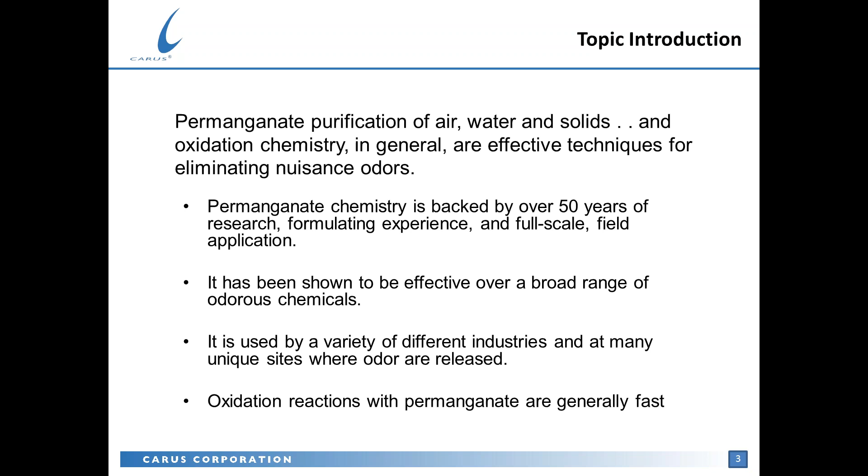So interestingly, over the past several months, we've had a number of requests for information on odor control. And I say this is a little bit unusual because we've had rather extended winter here in the northern part of the United States. And odors are really more of a hot weather, summer type of issue. But it did lead us to the idea that maybe the time was right for a webinar presentation on permanganate's role as an odor control technology, and to review in particular the various forms of permanganate products that we offer and how they make permanganate effective and easy to use.

Now in this presentation, I'm going to build a very brief foundation by introducing some basic concepts on odors and a couple that will simply review oxidation chemistry and specifically permanganate's unique oxidation chemistry. And that will lead us to the real purpose of this discussion, which is to describe the many permanganate products that are now available. And finally, how to identify different odor release and treatment scenarios that show how we can match the specific product to that particular location. So the problem of odors, it's a difficult one.

Odors and developing effective odor control is tough to solve, and in particular, one aspect of monitoring and tracking odors is that we have to rely on our nose, the human nose, as our detector. And that can make effectiveness a difficult goal and one that can be quite subjective.

You can see here on this particular slide, I've used an EPA diagram which shows that response to odor compounds by the human nose follows a sort of normal distribution. So there are some people at one end of the spectrum who don't recognize very many odors at all. And then we have the very highly sensitive population up at the right-hand end of the curve. And that makes odor measurement and detection a statistical analysis in particular.

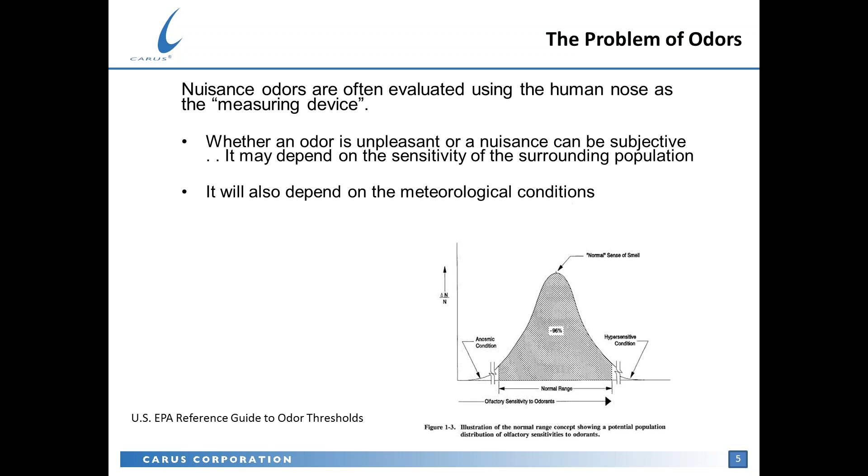Now, our sensory perception of odors really has four major components, and they are the concentration of the compound or the element, the molecule, its intensity and how we respond to it, its characteristic, and the hedonic tone of it, which is whether it's rather pleasant or rather unpleasant.

Now, the concentration is measured usually using a panel of people who are smelling different samples that are diluted with odor-free air. And there's a statistical analysis that tells us the detection threshold or the recognition threshold, and that's usually 50% of the panel that indicate that they have detected or recognized a particular odor.

In particular, though, I want to focus on the odor characteristics. So it's very common for us to identify odors based on how we respond to or how we recognize what that odor reminds us of. So, for example, we can describe an odor as being fishy or nutty or rancid or sewer-like. And these are important because they are tied to the molecules that we're detecting.

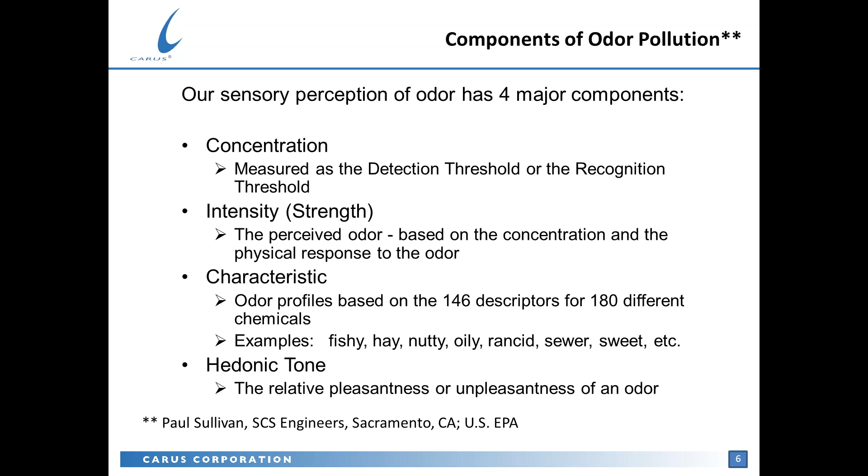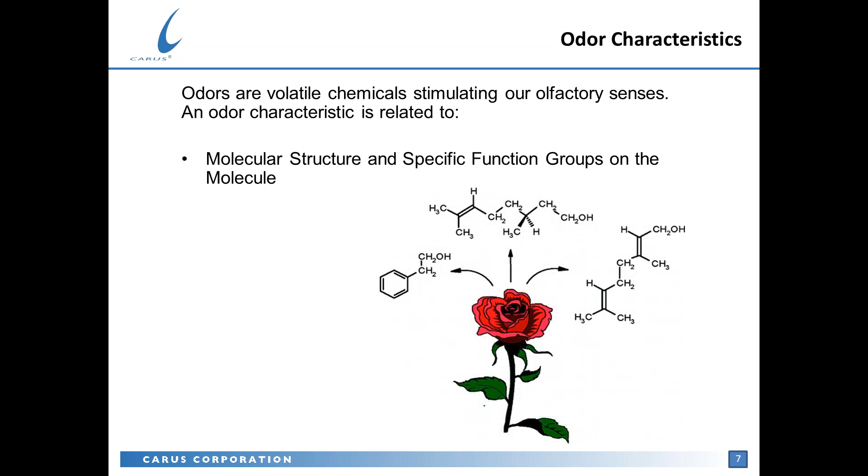So odors are volatile chemicals that are released into the air where they can be detected by our nose. And our perception of odor is triggered by the shape and also the chemical functionality on a particular molecule. Now notice that these molecules that are shown here have very distinctive shapes and elemental structures. And remember that on paper or on screen, these molecules look flat, but in actuality, they're three-dimensional.

And I also want you to notice in this particular slide the different functional groups on these molecules. So we have a phenyl structure or an aromatic structure. We have alcohol groups on these molecules. And we have unsaturated double bonds that contribute to the structure of these molecules. They're important when we investigate how permanganate may or may not help to solve an odor situation.

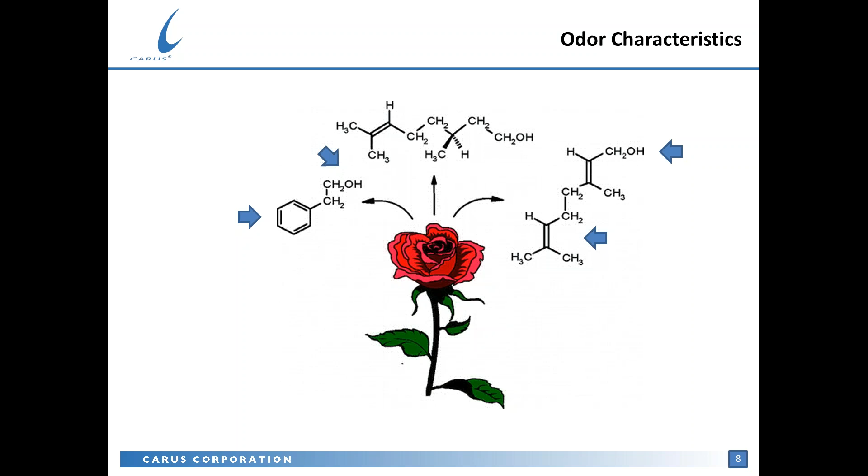So what is permanganate? Permanganate falls naturally into really two chemical buckets. The first is the group of manganese, the fact that it's a manganese compound. And manganese is a transition metal that is, like iron, found throughout the environment and is present in soil, water, plants, and animals that we live with every day.

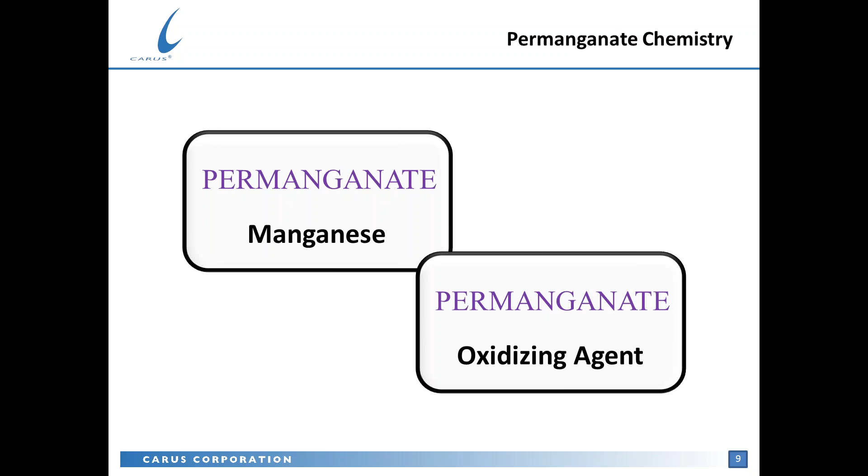Now, when we manufacture the permanganate, it becomes and falls into the category of oxidizing agents. And that is the chemistry that we take advantage of when we're doing environmental work. So during the manufacturing process, we inject energy and add oxygen into the manganese backbone that we start with. And to the chemist, oxidation reduction chemistry often involves the transferring of electrons.

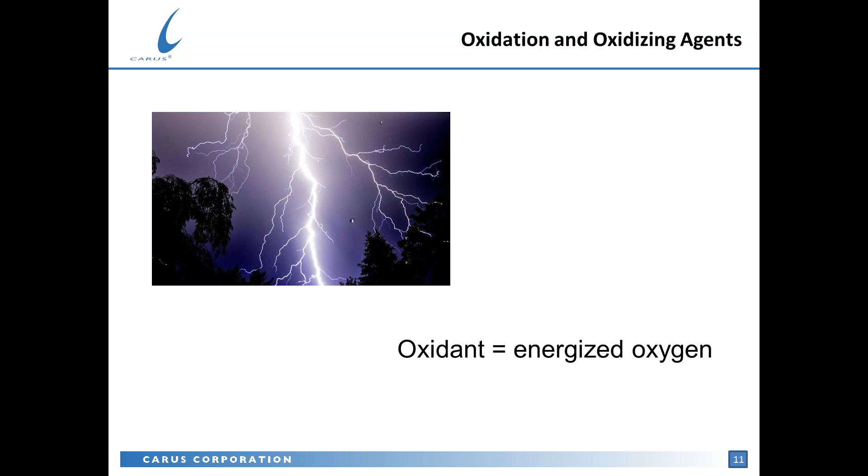But if you or someone you're working with is not really familiar with chemistry or with oxidants in general, it's easy to think of an oxidant just simply as energized oxygen. Now, it's likely that the name oxidation is a result of observations of our physical world. We live in, after all, an atmosphere of oxygen. So it's probably soon noted that almost all elements form oxide compounds just through exposure to air.

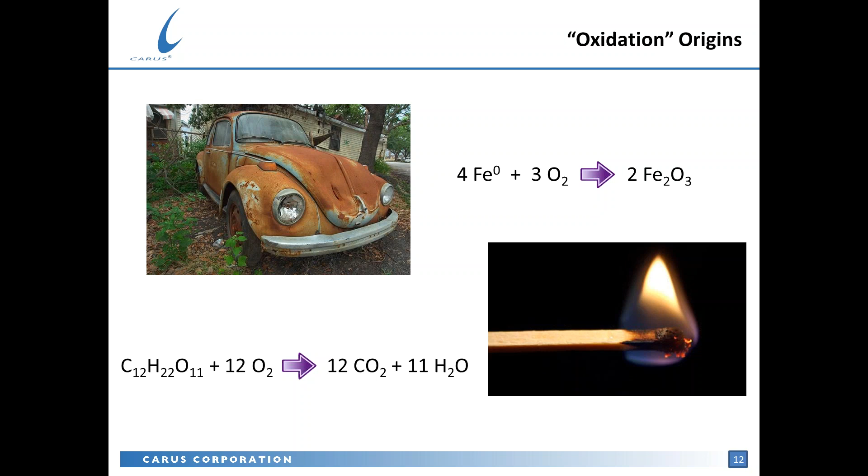Now, oxidation chemistry is actually important and actually is quite fun because it's a very versatile oxidation chemistry. Oxidants can be used and are often used to synthesize other materials. So we start with simple molecules and we convert them into something a bit more complex so that they can be used in a variety of different functions.

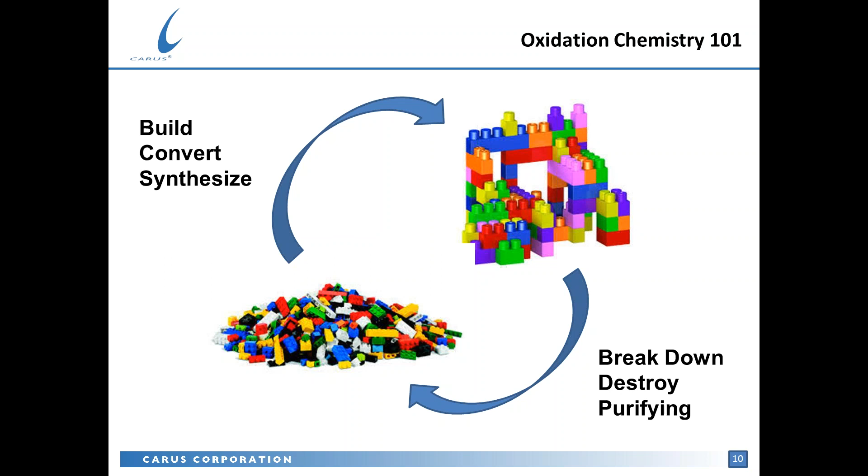However, in the environmental applications that we're generally talking about today, oxidants are very effective at breaking down large molecules and converting them into smaller bits, which are odor-free or tasteless, or are not any type of environmental problem after they're made that way.

So here's permanganate's half of the oxidation chemistry, or half of the oxidation reaction. On the left, you see the MnO4 ion. That's the permanganate ion that we represent here in purple color, because when permanganate is dissolved in water, it has a very distinctive pink or purple coloration to it.

Now, when permanganate reacts with a pollutant, it's going to contribute 3 oxygens to that reaction. These won't be free oxygen or dissolved oxygen in solution. They'll combine immediately with the compound that we're reacting with. And the manganese portion of the reaction will precipitate out as a hydrous floc of manganese dioxide, which is MnO2.

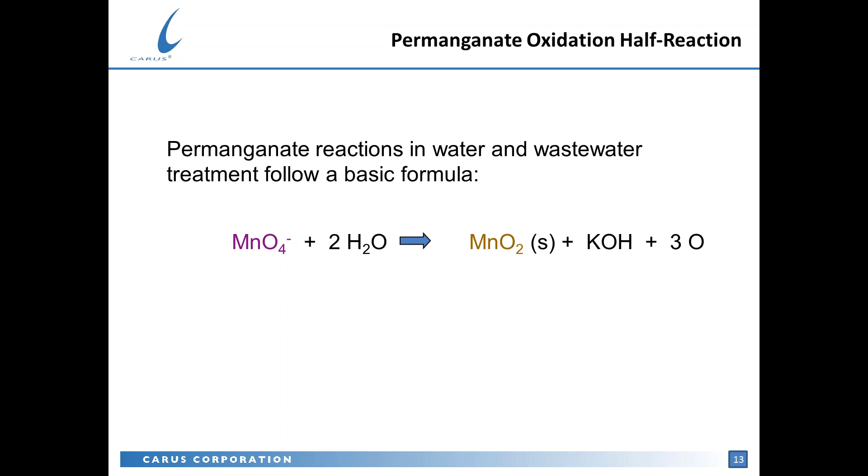The functional groups that permanganate tends to be very, very effective at reacting with are shown here on this particular slide. Permanganate likes to react with unsaturated double and triple bonds on organic molecules. It is very good at reacting with alcohol groups and the reduced sulfur equivalent of that, which would be a mercaptan type of compound. Permanganate reacts with phenols, with aldehydes and ketones, and it also reacts with nitrogen-containing compounds such as amines.

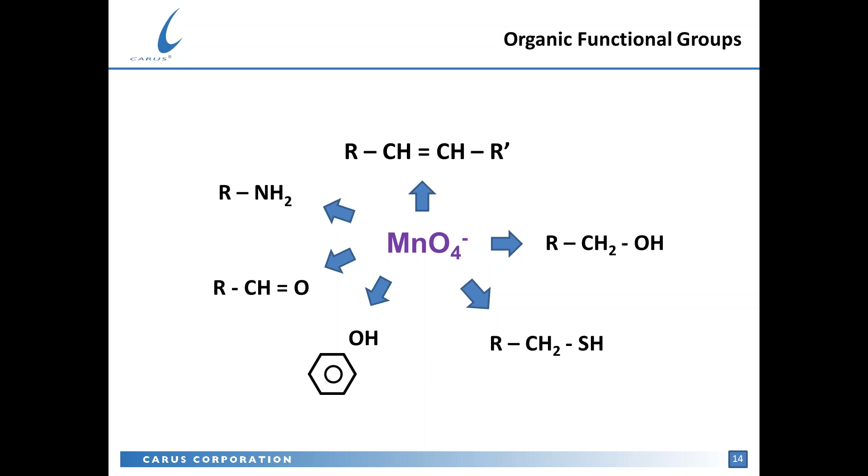Beyond the sulfur compounds, there are a variety of different nitrogen compounds that we react with. Different kinds of amine compounds are particular in this group, and those are the very fish-like or ammonia-like odors. You get into more distinctive compounds such as cadaverine, which is considered to be a very rancid type of odor.

And on this slide, we also show one of the aspects of odor molecules is that they can take on different characteristics depending on how concentrated or dilute they are. So indole, for instance, at very low concentrations can be considered to be flowery, where at very, very high concentrations it can be considered to be a very fecal type of characteristic.

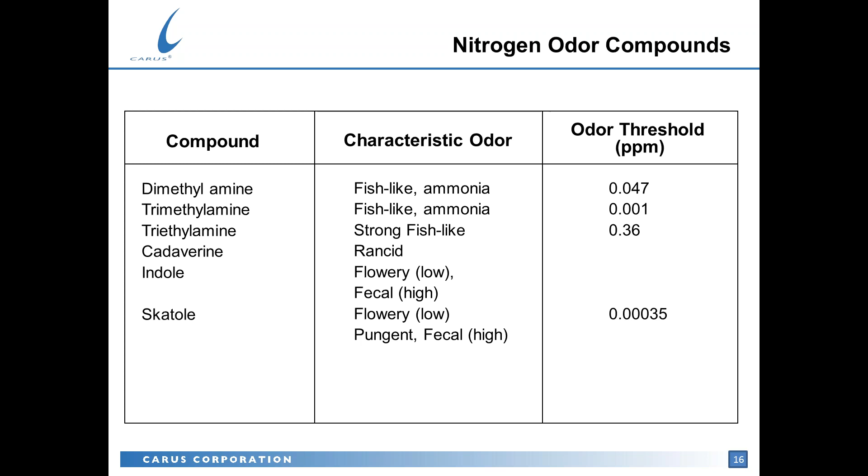There are other specific organic compounds that we can react with, from phenols and creosotes, styrenes and aldehydes of different types, benzaldehyde and acetaldehyde, butanol, which is an alcohol, and then just general odor emissions from different types of industrial processes, such as rendering plant condensate and asphalt plant off-gas were researched quite heavily, and permanganate was quite effective at controlling those particular odors.

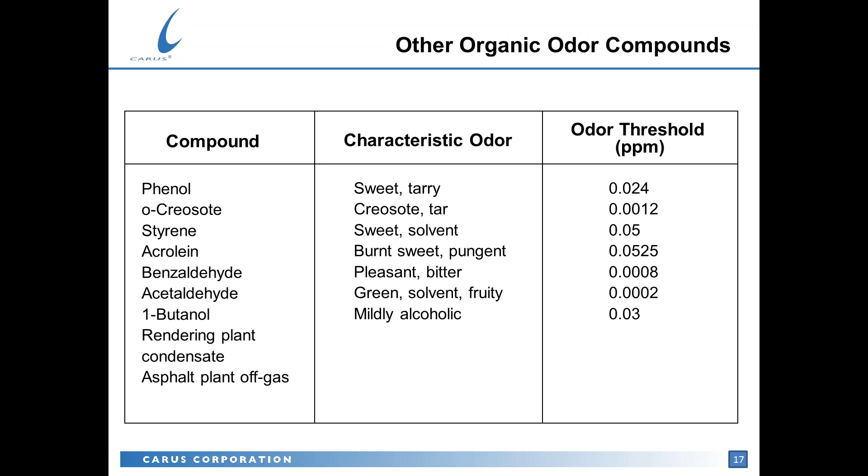Where are the points of odor release, and what are we looking for when we go to a particular site? It can really be released at any particular type of process or treatment step, but it's most often when the temperature of the water is high, because the gases are less soluble in water at high temperature.

Whenever there's a high surface area, such as a large clarifier or a pond or a lagoon, you can have a high flux rate because of the surface area. And of course, anytime there's pumping, mixing, spinning, squeezing, or cascading type of turbulence created, then these volatile odor compounds can be released.

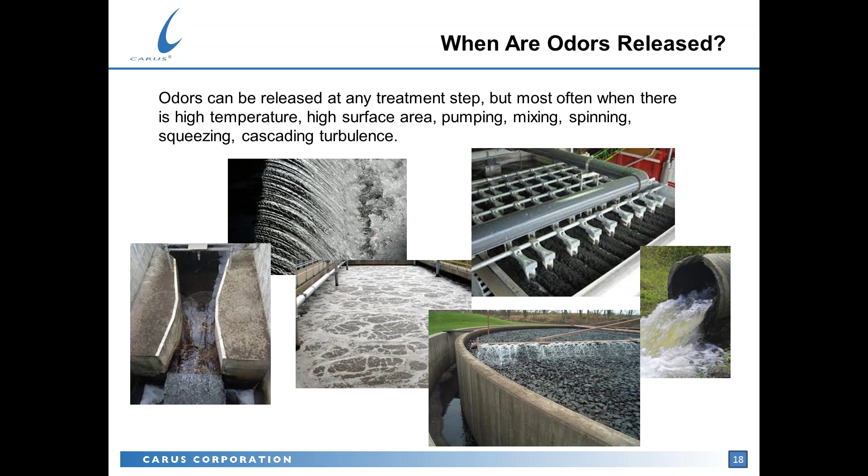So how do we look at these things from a practical standpoint? We know that the chemistry remains the same. The permanganate chemistry from site to industry will always be that permanganate will be reacting with an odor compound to produce an odor-free emission. The permanganate reacts rapidly and completely so that it's often added very close to where the odors are being released.

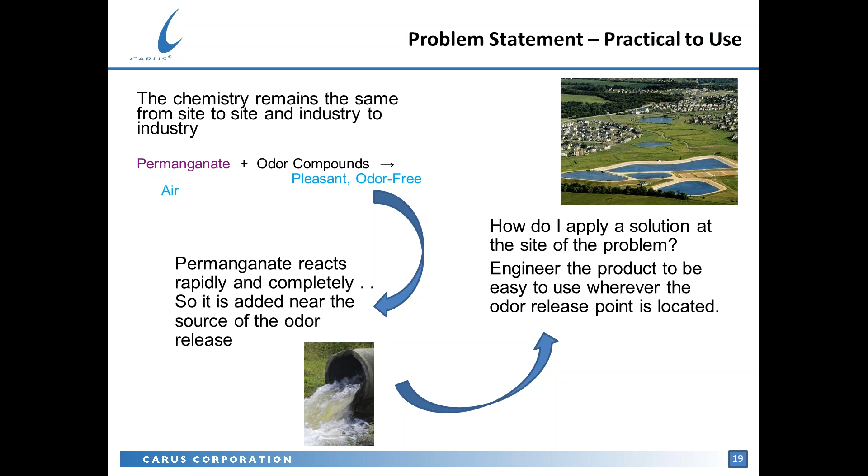So how do we apply this solution at the site of the problem? And one way is to engineer the product to be easy to use regardless of where the odor release point is. So let's look at some of these permanganate products. And I'm going to start with potassium permanganate, which is really the workhorse product. It's the product that is manufactured at all manufacturing sites as the first chemical.

And it can be produced in different grades. So we can produce just technical grade material, which is 98% pure. And in a lot of cases, we blend it with a desiccant to make what we call the free-flowing grade. And free-flowing is probably the single most popular grade of potassium permanganate that's manufactured.

Permanganate is a stable product, and it's stable for quite a long period of time. So we can manufacture it and package it and deliver it to the customer site in a sealed container.

Potassium permanganate has a broad spectrum of particle sizes, some of which are quite fine, and the permanganate product as a dry product can be rather dusty, especially when there's the free flow desiccant that's added into the product. And this dry crystalline material is often fed and metered correctly into a treatment process through a dry chemical feeder, where there's a hopper and a screw type conveyor which meters out the correct amount of material.

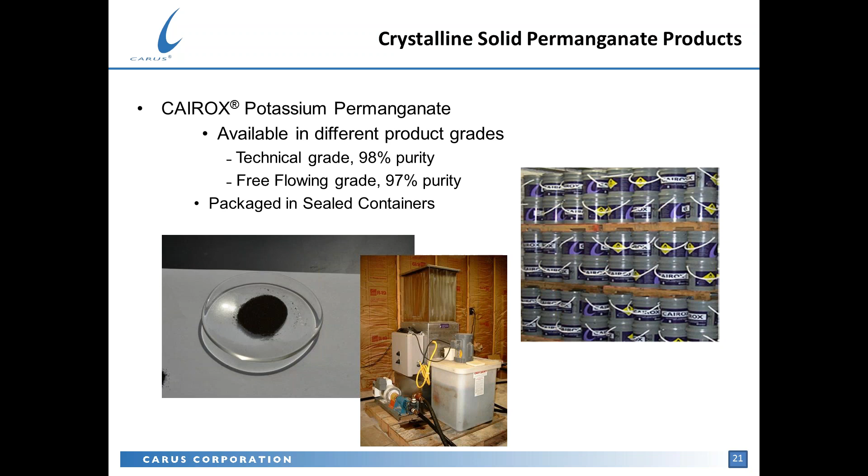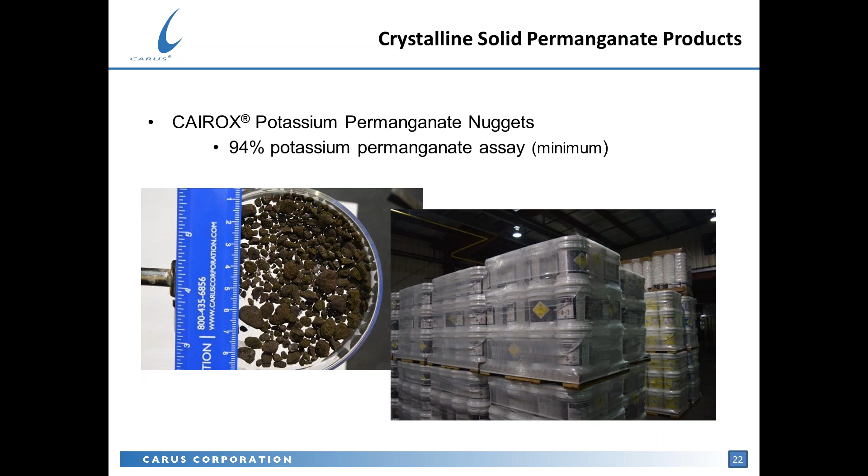Now there's a special form of potassium permanganate that we like to use, and that's what we refer to as nuggets grade. It's a product that we can make in our process. It is much larger in size than the technical or free-flowing grade permanganate products. And we can use the fact that we have these large chunky types of crystals present to use them in a variety of different application areas that we'll talk about a little later.

We also are now manufacturing a product that we offered a number of years ago and then stopped manufacturing, but are pleased to say that we're back and producing again in a slightly different format. And that's the CAIROX CR tablets, which are a permanganate product where we add a binding agent and then press the material under pressure to produce a hockey puck type of product that, when immersed in flowing water, releases the permanganate slowly and in a controlled way. These tablets are primarily permanganate in nature. They're 70 to 80% permanganate assay.

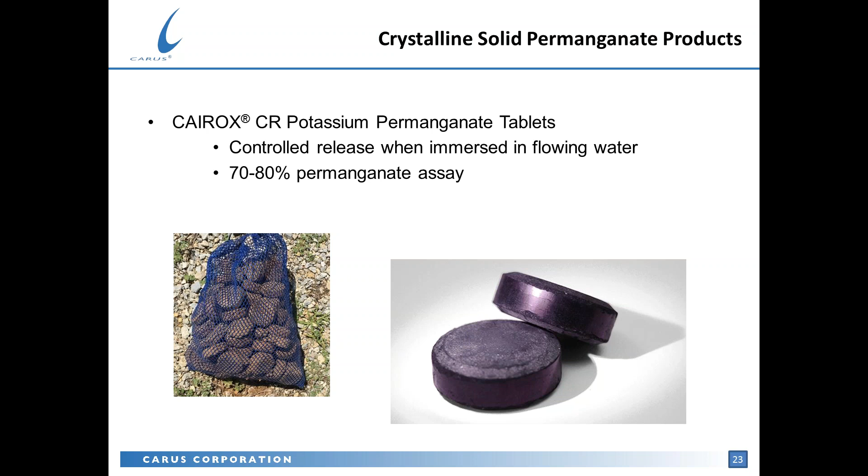Now, in addition to the dry crystalline products that we manufacture, permanganate is also manufactured as a concentrated liquid. And there are really two grades of that available. One is Carusol liquid, which is 20% active ingredient. And the second product is Carusol C, which is a more concentrated form and is offered as a 40% active ingredient material. These products are also very stable and can be packaged and delivered to the site in sealed containers.

We manufacture different types of permanganate blended products as well. An example of that will be Totalox odor eliminator product, which is a special blend of calcium nitrate, 40%, and permanganate, 1%. And this product is specifically manufactured for wastewater collection systems where you're trying to control odors for a long distance or a long time period.

I mentioned earlier that permanganate oxidation chemistry is very rapid and reacts quickly with the odor compound. But in a long transmission line, you may want to control odors for long distances and for long time periods. And that's where the nitrate product is particularly effective. So the combination of the two provides a very quick oxidation reaction where the product is being introduced to remove odors at that point, and then the nitrate product controls the formation of odors further on down the pipeline.

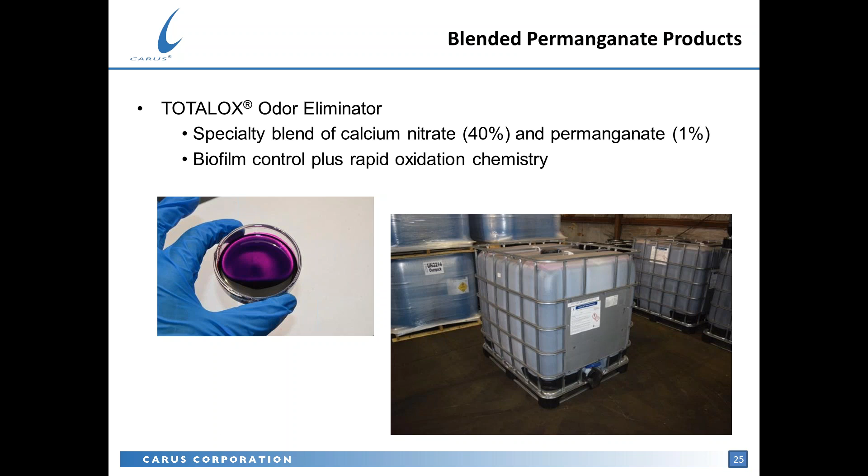I've included in this presentation a product that is not manufactured by Carus Corporation, but is manufactured by a company called Purafil Inc. And that's a Purafil product where permanganate is coated on alumina spheres and is used as a dry filtration type of media for controlling contaminants in air. It's particularly good when the contaminant load is low and when it reacts rapidly with the permanganate coating on the outside of the pellet. So it's used often for reduced sulfur compounds such as hydrogen sulfide and sulfur dioxide.

It's used for indoor air quality improvements, so it removes formaldehyde from the air. It also reacts with nitric oxide, NO. And it is used often in controlling off odors in large rooms such as auditoriums or airline terminals, and for protecting in particular electronic devices which would be particularly sensitive to corrosion due to hydrogen sulfide.

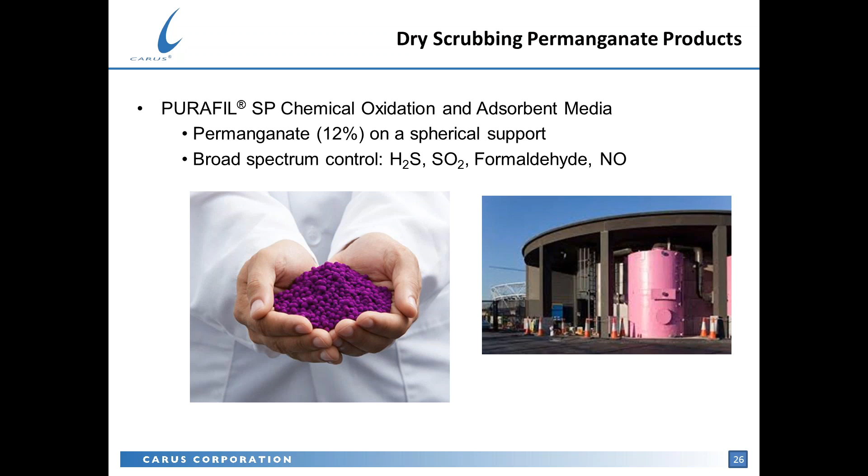So let's switch over and talk about different types of application sites that we run into and how we can fit permanganate products to meet those requirements. So here's a very common site where we're working at a treatment plant of some type or an industrial plant.

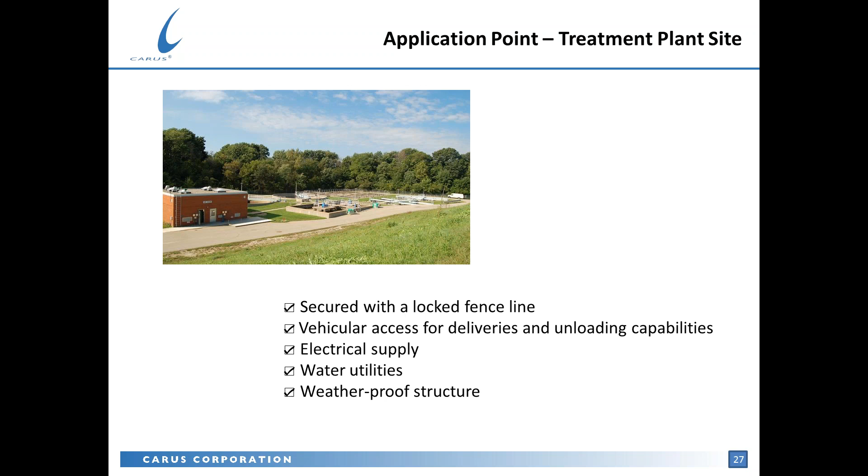The aspects of this which are important to us are that it's a secured facility. There'll be a locked fence line around it so chemicals can be protected. There's access by road to vehicles, so you can deliver chemicals to this site, and it probably has unloading capabilities as well. We, of course, have electrical supply and water supply at these particular sites, and we have access to weatherproof structures.

So what products might we use if we're trying to control an odor problem at a treatment plant site? That really includes all of the products that I introduced. We can use the potassium permanganate dry products, feed them through a chemical feed system, or prepare a concentrated solution of those products, put them in a storage tank,

and then meter that concentrated solution using metering pumps of some type. Or we can simply deliver the concentrated products that we manufacture here to the site as a packaged material in, say, totes, or as a bulk product that we can deliver directly into a storage tank where we would then meter the correct amount using metering pumps.

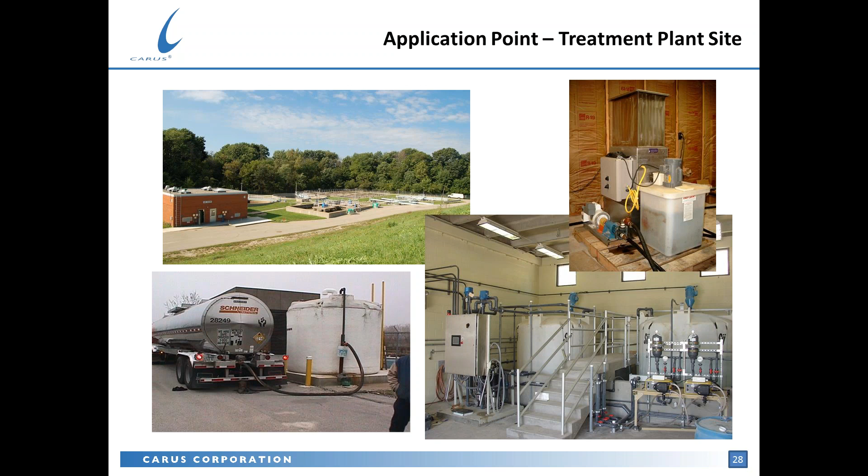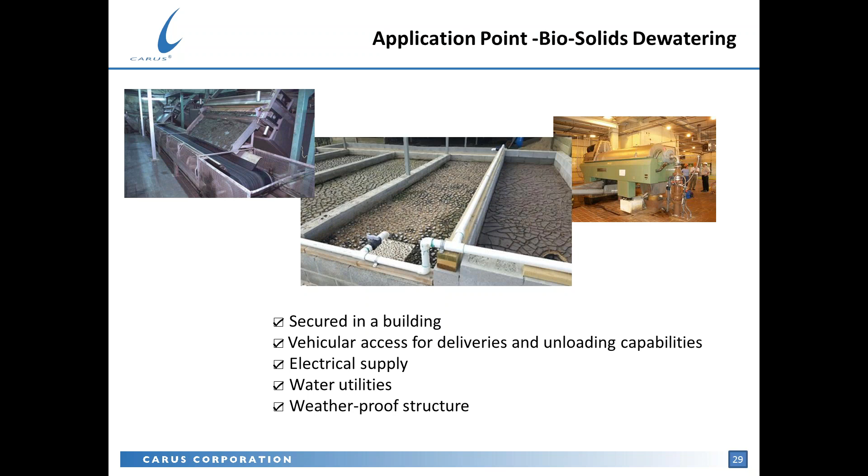Within the treatment process itself, we sometimes treat biosolids or odorous solids of some type that are being dewatered. Again, we have almost all of the necessary requirements of secure buildings, vehicle access, and electrical and water utilities present. So we can use almost all of the products that we offer, from the dry crystalline permanganate products to the concentrated liquids.

The concentrated liquids are used often because they can be installed easily. A small metering pump can be introduced very quickly, and we can get up and running in a very short period of time, injecting the permanganate directly into the wastewater sludge solids on their way to the dewatering device.

We even use these products to treat drying beds, where we can treat the surface of the material and destroy any odor compounds that might be released from that exposed surface area.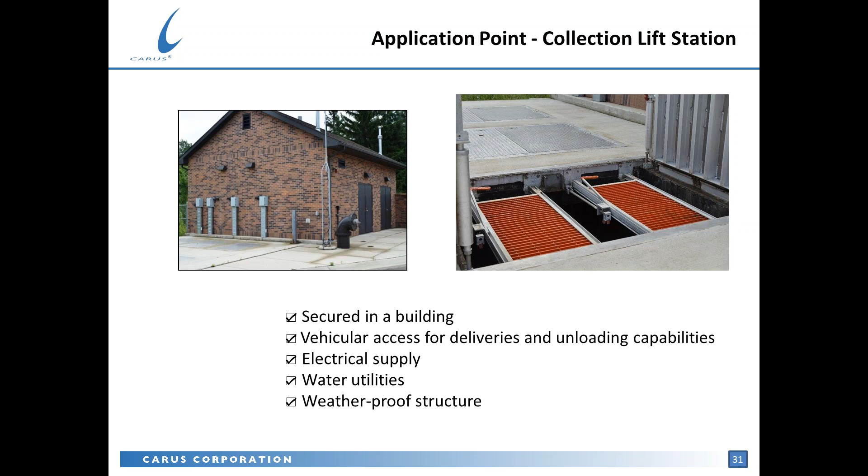You can usually deliver material to these sites very easily, and you have water and electrical supplies that you can take advantage of and use the different types of chemical feed equipment that are available. In this particular case, we were able to bring in drum sizes of the Carus liquid product, and we mounted peristaltic feed equipment for delivering the correct amount of permanganate on an hourly basis.

In this particular case, I mentioned that there was a chemical feed room already installed at this site, so we had a chemical feed line that went out of the building and upstream of the wet well by about 100 yards, into a manhole that was available in the upstream line.

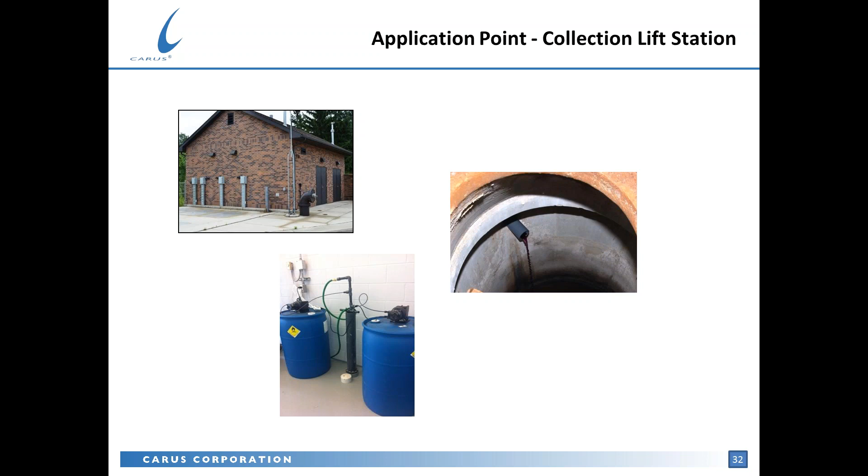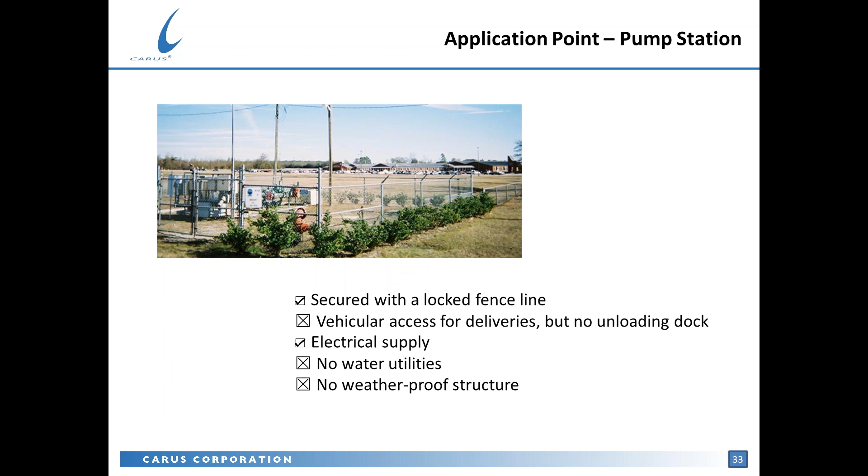We have electrical supply at this site, but we don't have any water utility other than the collected wastewater itself. And of course, we don't have a weatherproof structure at this site. Now, this might be a perfect site for using the controlled release tablets, particularly if the release of odors is not particularly high. You can also bring a tote into this site and use a metering pump to deliver the product into the collection wet well.

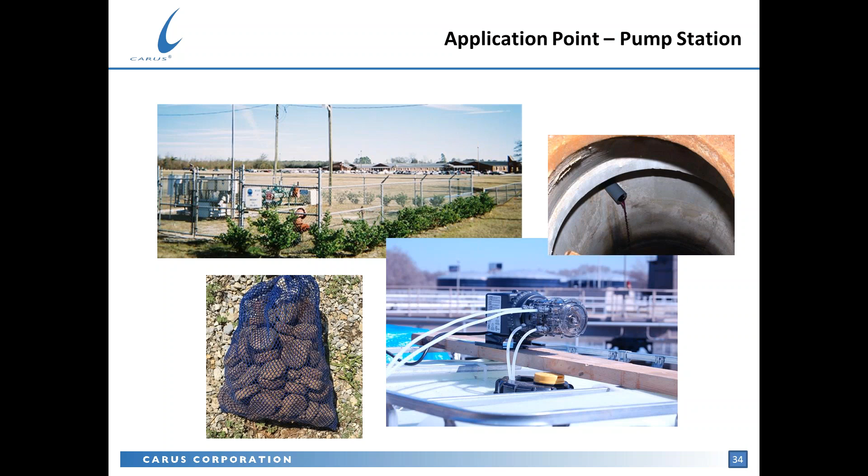The pumps are not particularly waterproof, so they should be protected from weather and from rain in particular. And you can also site a small protective building on this location where you can place chemical feed equipment and the drums inside.

Now here's a really tough situation: what do you do when the odor release point is from a manhole that's, say, in a sidewalk or in the middle of a street in an urban area? You don't really have any of the characteristics that we would normally be looking for. It's certainly not secured, so you can't site a chemical feed system near this site. And you don't have any electrical or water utilities available to you.

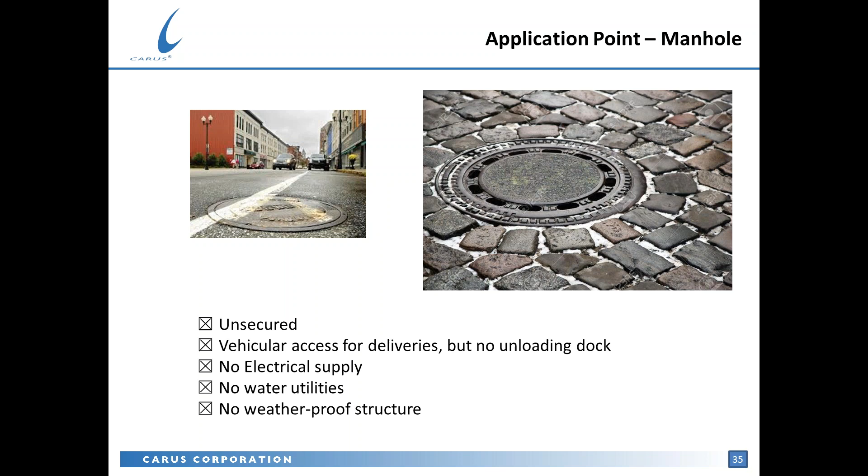So this is where the controlled release tablets are particularly effective. The tablets are usually placed in some type of porous container. There's a polyethylene mesh bag that we use and is available for holding the pellets. And then the tablets are dropped into or suspended into the flow that's going through that particular manhole. And the flow dissolves the material very, very slowly and in a controlled way.

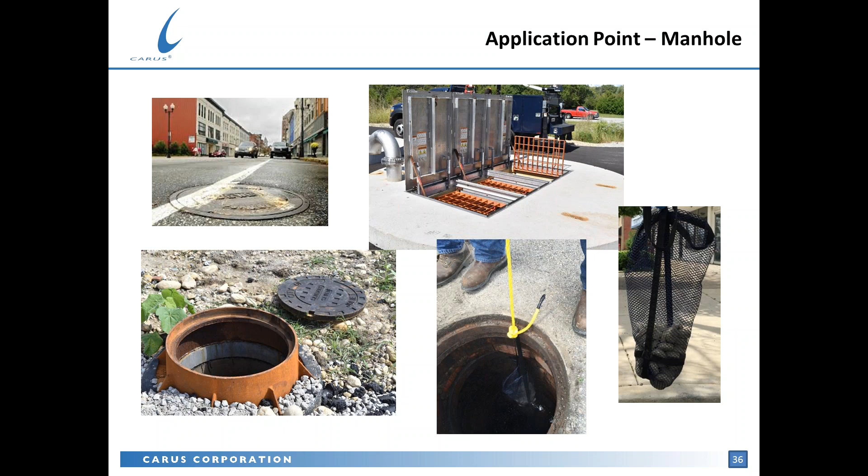If you have a larger station, as in the picture at the top right-hand side, you might have to actually drop in a couple of different bags in order to get good distribution across a large flow area. But in a lift station such as this, the action of the increase and decrease of the level of the water in this station creates enough turbulence so that we can dissolve the material away. You can control the amount of permanganate that's being dosed in these sites by the number of tablets that you immerse into the water flow itself.

Here's another particularly difficult situation. That's when you're working with lagoons that are releasing different types of odors. They may be secured. They may be on the property that is owned by the facility that is using this lagoon. So you can get chemical feed out to these particular sites. Deliveries are not particularly easy and must be thought through carefully when you're trying to deliver permanganate to these particular areas. And often you won't have any particular utilities, in particular any kind of water utility out to these sites.

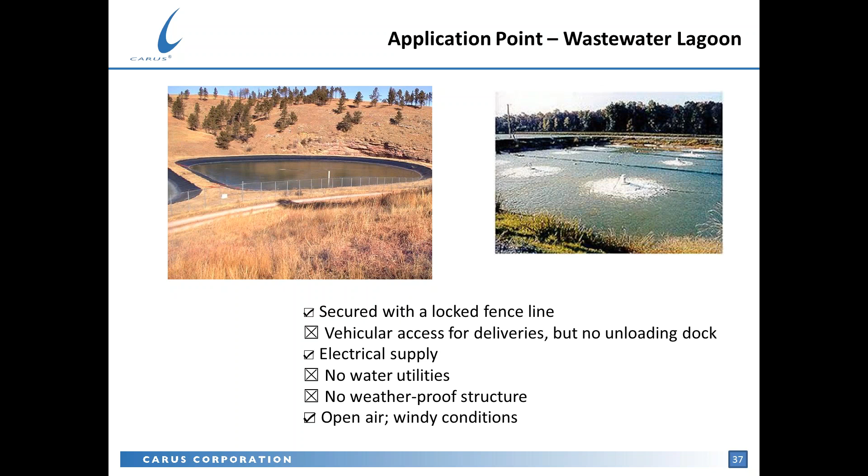And of course they're open air and they're windy conditions, so using something like the crystalline potassium permanganate product is not easy because the wind will blow it around. So this is where we can use the products such as the liquid products or the nugget material, which is designed particularly for open air use. It's much less dusty than the potassium permanganate crystalline products. And it's designed to be broadcast into lagoons where it can treat not only on the surface, but it is heavy enough to fall through the total water column and down into the bottom of these lagoons where a lot of the odor is being generated.

If the lagoon is small, it's relatively easy to use a fertilizer type dispenser to broadcast the nuggets from along the edge of the pond, or to use chemical feed that goes out to, as you can see here, different types of aeration that are already mounted into the lagoon, and where we can use the aerators as our mixer when we're feeding permanganate liquids out to those particular sites. In addition, I might just add that permanganate chemistry is particularly effective when we also have a lot of dissolved oxygen present, because that manganese dioxide that precipitates from the permanganate reaction works quite well as an oxygen transfer catalyst for a variety of different odor compounds.

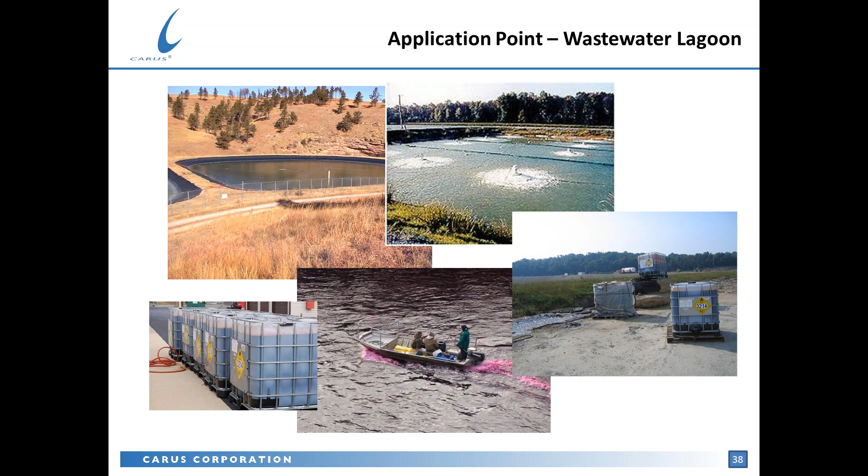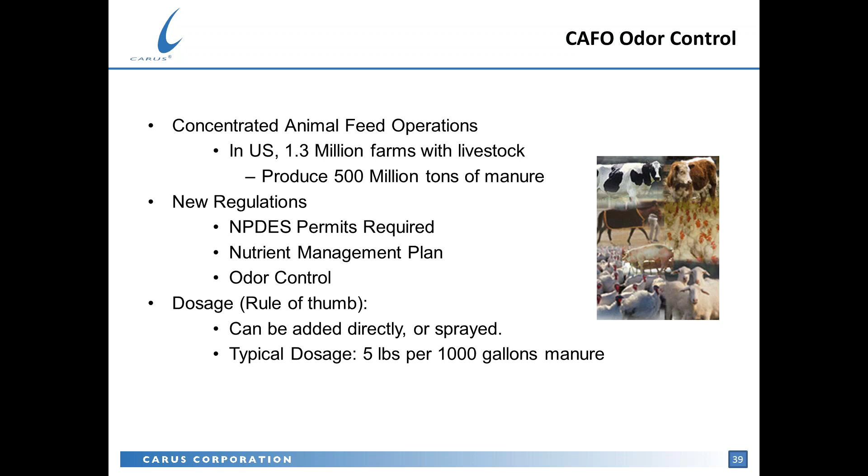And I would mention that some of the types of application areas that we get involved in include concentrated animal feedlot operations. So the cattle industry and the hog confinement industry do use permanganate to control manure odors at these particular sites. In these sites, and also as in the case of drying beds for wastewater plant biosolids, we often make up a permanganate solution that can be sprayed onto the surface of these areas to control the odors that are being emitted.

So that's a good spot to stop and see if there might be any questions that you have about either the products or the application areas. Great. So one question that's come in is, is Purafil SP available through Carus? So no, we don't resell those particular products. The best way to do that is to contact Purafil directly, and they will direct you to their local representatives who can handle that particular product for you. And they'll also work with you on the design of the container, the equipment that goes with that media, so that you can put a complete system together.

Great. And another question is in regards to feed equipment. Does Carus supply feed equipment, or can you just make recommendations of vendors and materials? Yes, for the permanganate products that we manufacture, both the dry crystalline material and the liquid products, we can provide feed equipment and feed equipment designs through feed equipment companies that we work with.

We often inventory pumps, metering pumps here at our site so that we can respond quickly to a request. But there's nothing that we do other than make sure that the products, these equipment products, are compatible with permanganates from a materials of construction standpoint. They are basically products that we can get and you can get from manufacturers directly as well.